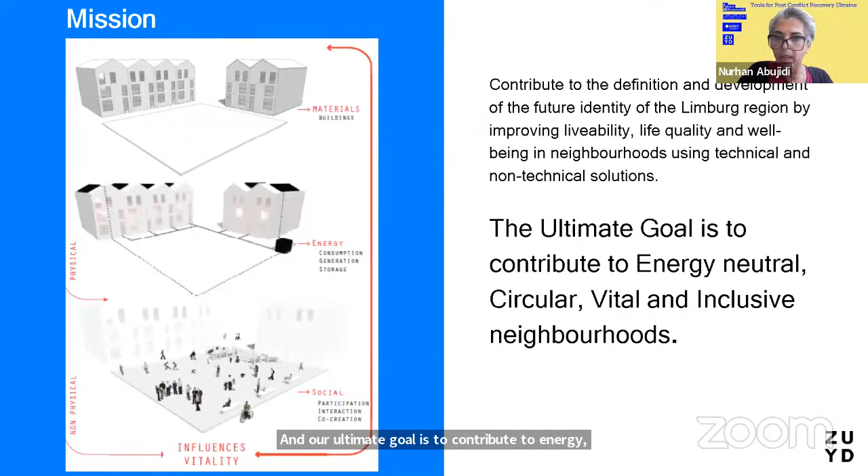So Smart Urban Redesign Research Center looks at neighborhoods focusing on 3 flows: material, energy, and people. And our ultimate goal is to contribute to energy neutral, circular, vital neighborhoods. Of course, now having this parallel discussion between the Netherlands and the occupied Palestinian territories, for me, it is actually where I find sometimes different types of destruction outside war zones also cause certain traumas, loss of identity, also losing the most important physical infrastructure that connects people to their heritage, identity, past, and also being a community in that very specific context.

From there, the parallels that I would like to share with you now. Of course, in the Palestinian occupied territories for decades, there is an ongoing process of destruction and reconstruction taking place. And I want here to highlight that the destruction goes beyond the physical built environment and infrastructure. It's about people's homes. It's about their being a community with a certain identity, heritage, and history connected to that physical built environment and infrastructure for the Palestinian case.

And I see many parallels also with the Ukrainian case. Very shortly on Limburg, and why we see these parallels between other types of destruction. Limburg, in the south of the Netherlands, also flourished thanks to the mining industry for decades. But in the 70s, all this industrial and physical heritage was wiped out in a matter of 2 to 3 years.

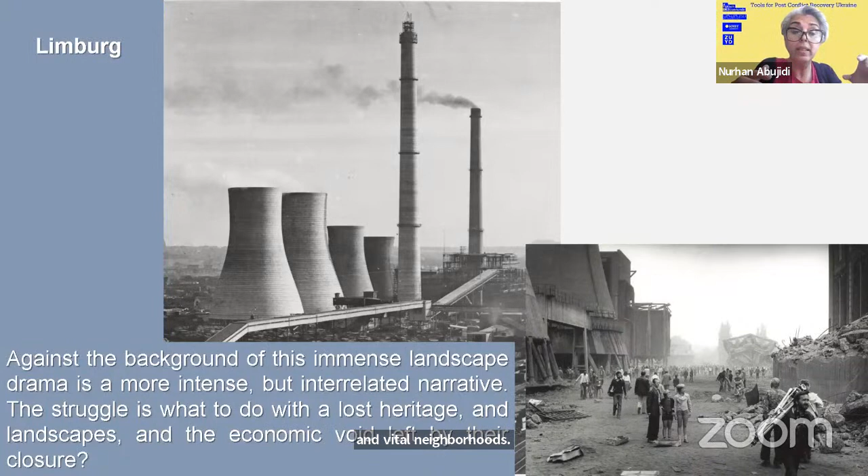And of course, within this background, you can notice from the 70s till now that it was a huge trauma for the local community, where they lost their sources of income, their social and spatial connections, and so forth. And there was also a huge economic void after this closure. And now we are working on how you can make an urban development and proceed towards achieving circular, energy neutral, and vital neighborhoods, while it seems like time froze for the inhabitants of South Limburg.

So the tips that I will now bring, or the lessons learned actually for our Ukrainian colleagues, concern waiting for big structural projects that will be expensive and long-term, waiting for this war to end and then starting the reconstruction process, and also being very much aware that foreign aid always has political agendas that might not fit with the people's ambitions about how their cities need to be reconstructed.

So to answer these questions, we are calling to use tactical urbanism to facilitate the start of urban transformation. And how can you do that? Learning from the Limburg context, these are the main pillars of the actions we are doing now in diverse neighborhoods in 5 cities in South Limburg. And the most important one is, though it is a trauma and dramatic situation, to use it as an opportunity to reimagine a bright and prosperous future. And that's why you need to look at it from an integral vision, in an interdisciplinary way.

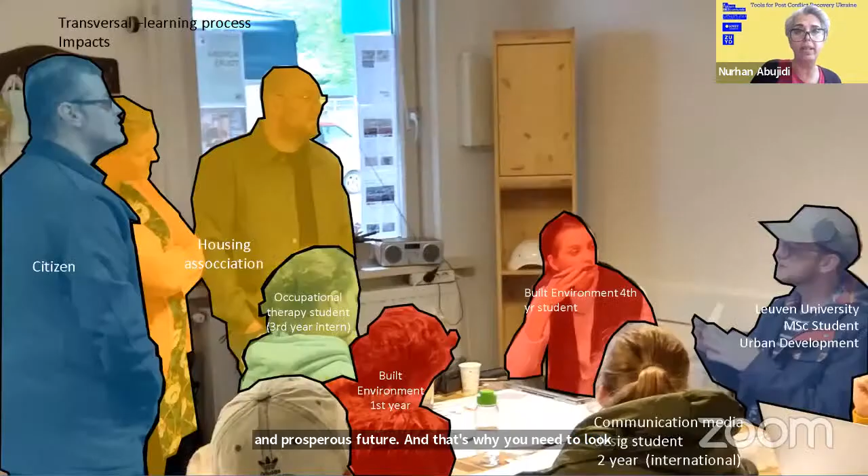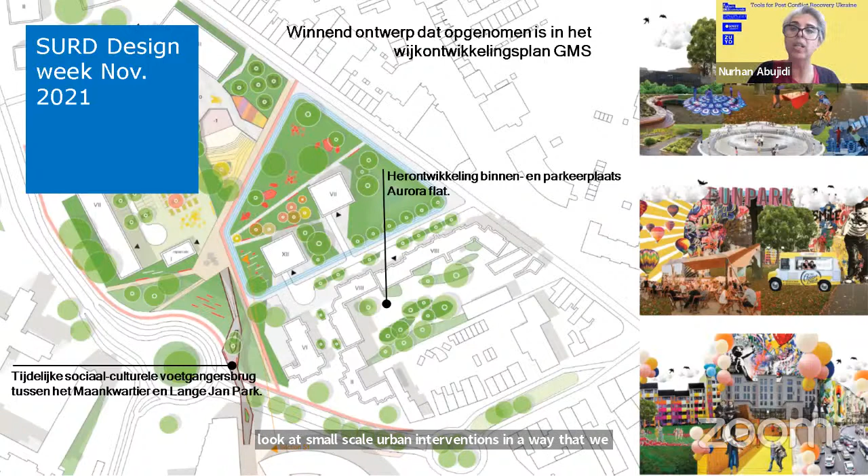The way we organize it, for example, in Heerlen, we try to engage our students and professionals, bachelor, master, and PhD from different disciplines, to look at very specific contexts, challenges, and questions about the urban transformation, together with our partners like social housing associations, and most importantly with the local citizens, to develop that vision from an integral perspective. Through very intensive design weeks and challenge weeks, we look at small-scale urban interventions so that we can start transforming the vision into more strategic projects and actions.

The three other pillars are, first, ownership. Ownership is not only by the stakeholders like the government; ownership, commitment and engagement require all engaged stakeholders to be active in this process. Most important is the local community, because they are the ones who need to define what kind of identity they want to produce or maybe sustain in their neighborhood. So their engagement is crucial in this stage.

And the third one is start small. Of course, you cannot just solve all the problems at once. We need to see what kind of strategic and tactical interventions are needed. So we are promoting action research in co-creation with the local community and stakeholders. We are physically present in the neighborhood via all these design weeks and different forms of activities that we organize during the whole year, challenges and so forth.

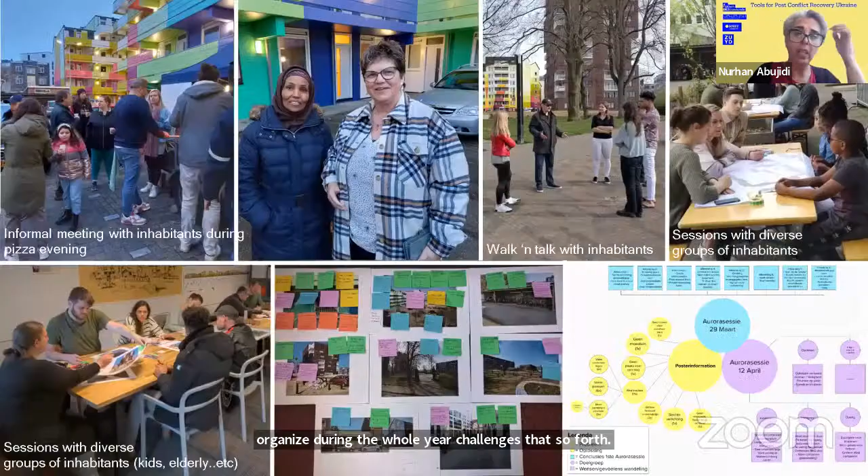And we try to make it a dialogue. As you see here, with the local community, we try to engage them to collect their ideas, ambitions, and perspectives for the development of the neighborhood in an informal and formal way, through qualitative and quantitative research.

The organization of these activities also requires us to live in or be permanently present in the neighborhood, to pick up the invisible dynamics that are important for that neighborhood and the local community, especially in neighborhoods with huge cultural diversity, which we find important to celebrate as part of the identity of the community.

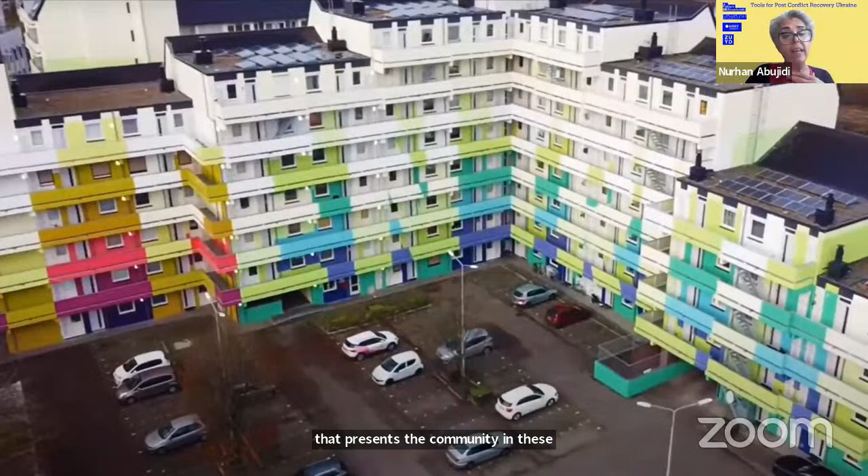An example is the Aurora social housing block, a strategic, very small project where this parking plot was transformed into a community space, while also being climate adaptive, circular, and celebrating the diversity of that local space.

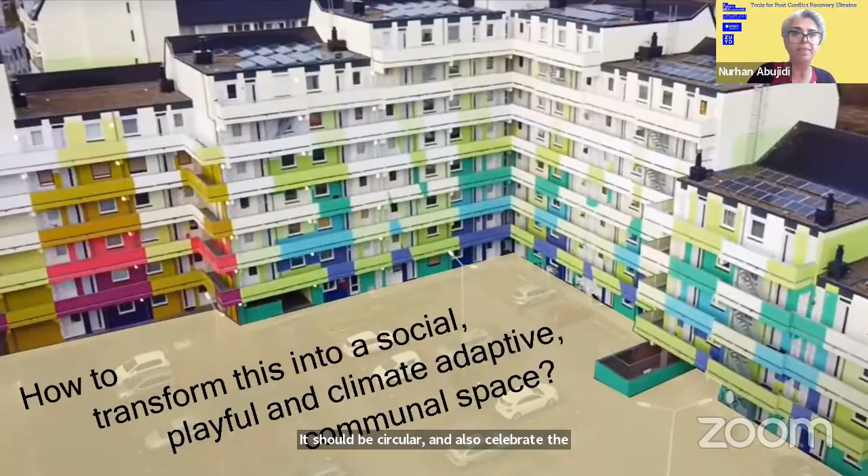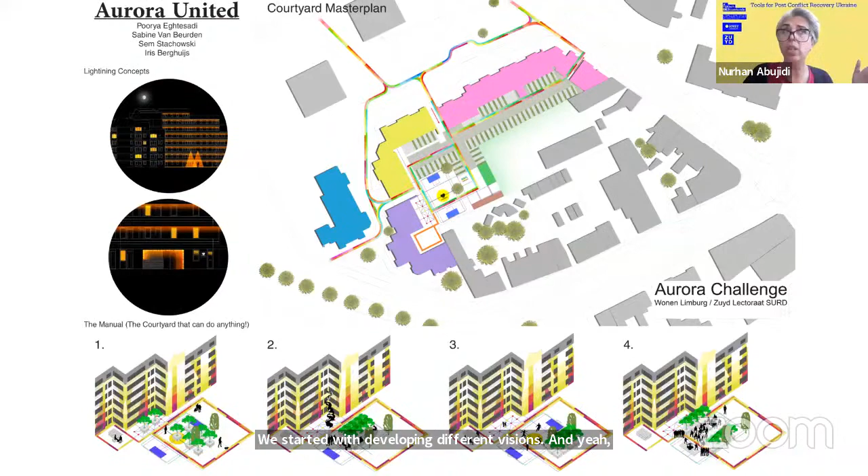We started with developing different visions, with different challenges and workshops over the past 2 years. This is how it looked 2 years ago.

Through the development of these strategic interventions, we developed a prototype from recycled materials, in this case wood, and experimented for at least a year with how people acted, reacted, or used this intervention, to see if it fulfilled their ambitions and needs in this specific space.

The last point I want to share is about using and focusing on local resources for value creation. This value creation goes beyond the material and environmental perspective; it is also about economic and social values.

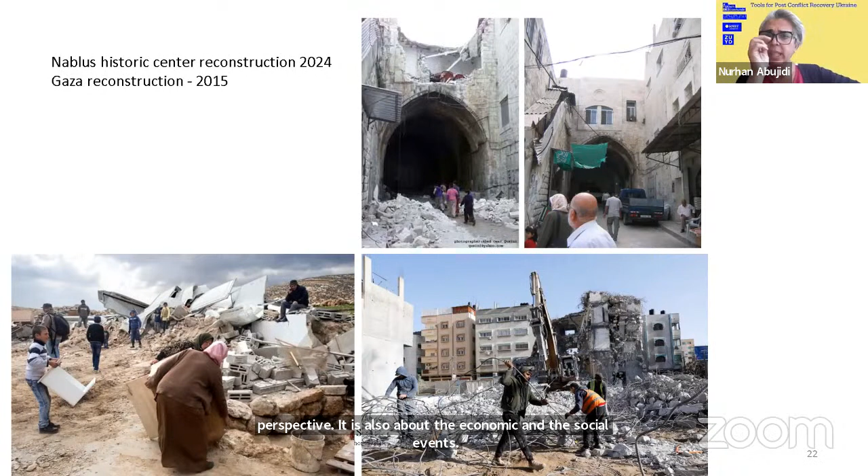Just examples from the Palestinian context: from the Nablus Historic Center reconstruction, and in Gaza, people use existing demolished material to reconstruct their heritage sites. We also build some temporary housing.

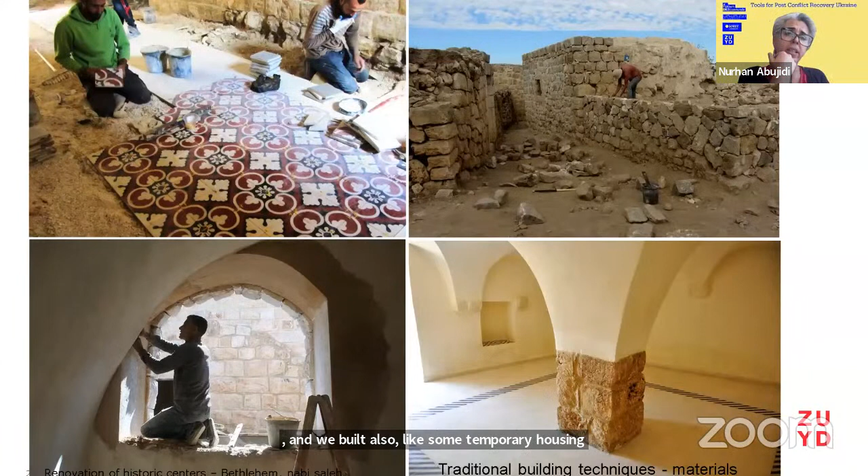We're capitalizing on existing building techniques for heritage sites, which are very important to maintain the heritage identity of the historic centers of the cities.

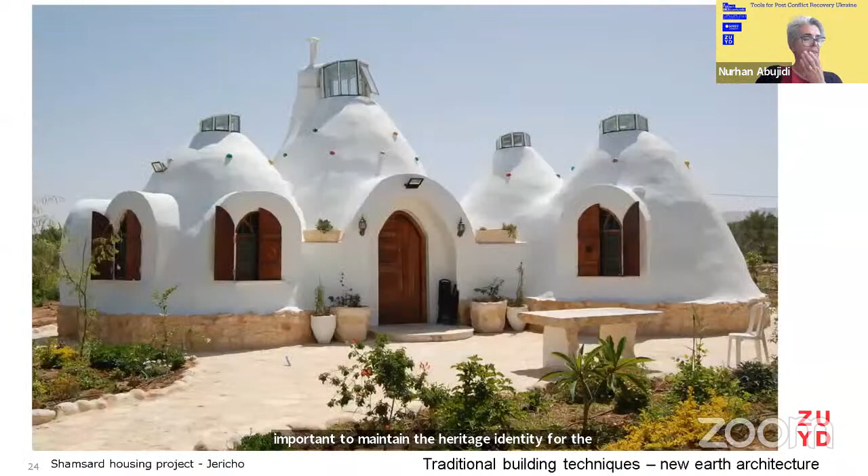Other professionals and young architects have used other approaches, like earth architecture, to produce new forms of housing, as we see in the houses built in Jericho.

I will end this quick introduction with a very interesting and unique innovation by an engineer in Gaza, due to the lack of construction material from the 20-year siege. He created a new type of brick using earth with added material, now tested in Gaza and being scaled up in other locations.

What I'm trying to say is it's very important to be tactical and pragmatic. While the war is going on, we need to keep feeding everyone interested in the reconstruction process, joining forces with existing resources and skills from students, young professionals, architects, and local stakeholders like social housing associations and municipalities, to see how you can start small in the neighborhood with strategic small-scale interventions that improve life quality and maintain people's hope to continue reconstruction after the war. I'll leave it here.

Yes, well, Roberto, thank you for introducing Zuyd and myself for this lecture, and thank you for having us here and providing the opportunity to present some of the research we are doing. My goal for the next 25 minutes is to inspire you, maybe a little bit to provoke you, and this will end in a short workshop where I try to collect some of your reflections and ideas on the presentation.

I will share with you in a minute. As Nurhan already said, my presentation is based on the Superlocal project, and I would like to start by first very briefly discussing the program.

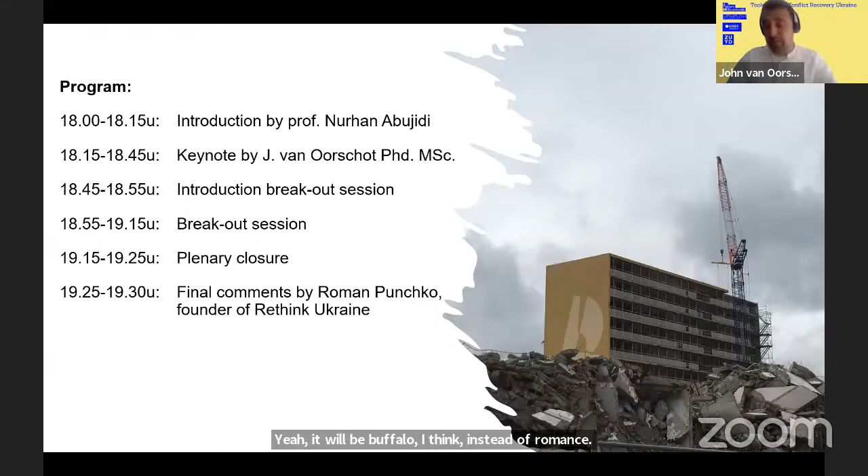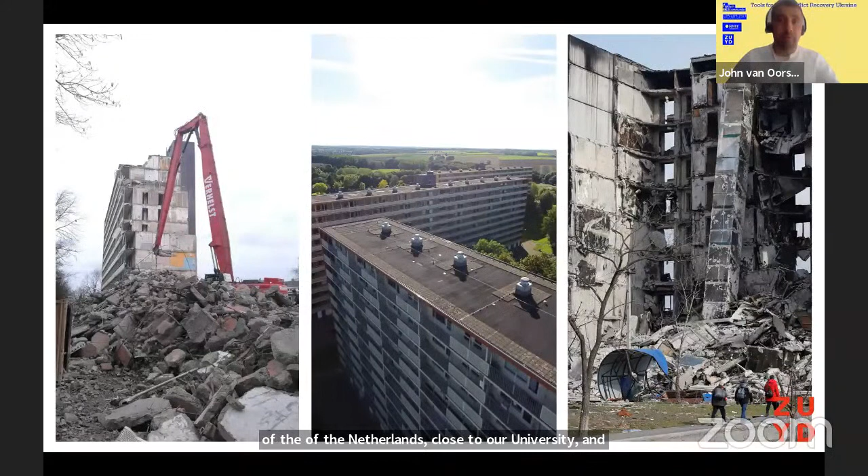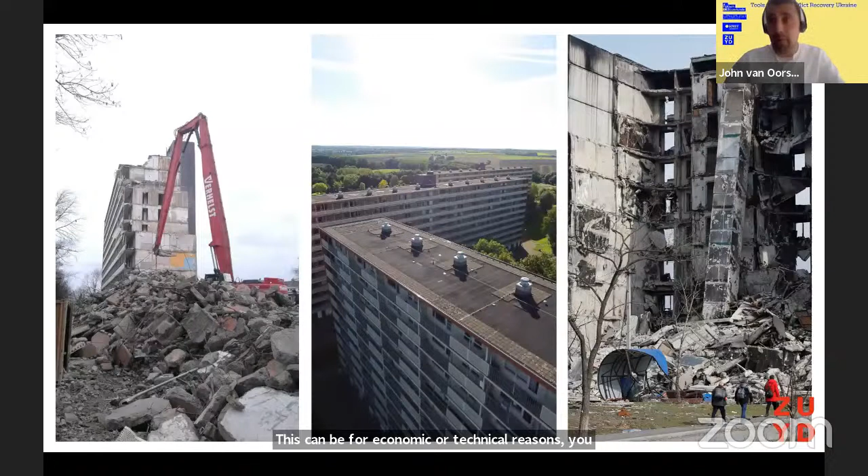I'd like to start with this picture. Typical 10-story apartment buildings, you can find them everywhere in Europe, from the far north to the south, from east to west. These apartment blocks may very well stand in Ukraine somewhere. However, this picture was taken in the south of the Netherlands, close to our university. Whatever happens with this building, at some point in time, these buildings tend to become obsolete. This can be for economic or technical reasons, or they are damaged by conflict, by war activities.

Unfortunately, in the middle, the same apartment buildings. On the left, what is happening in the Netherlands at the moment: these typical apartment buildings are demolished if they become obsolete. On the right side, it's not a demolition project, but a picture I took from a news feed about war damage close to Kiev. What is very unfortunate is that demolishing these properties this way also comes with a lot of loss of value, and that's for a large part material value, valuable materials being lost and turned into waste.

This fits within the take-make-waste economy, which is now most prominent around the world. At the same time, it's not only material value that's lost, but also social value, because this building was somebody's home. This building also represents social structures, groups of people living together. So besides all the material and technical values lost with demolition, intentionally or not, that also comes with the loss of other values being lost forever.

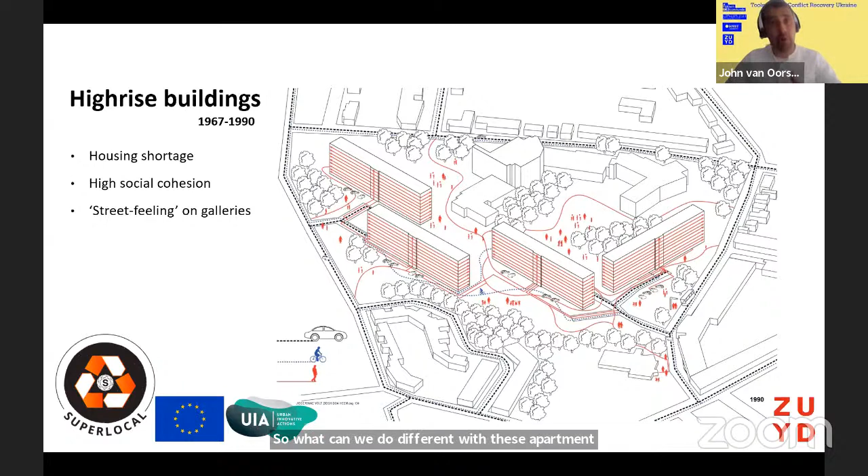What people experienced, as they tell us who actually lived in these apartment blocks, is they had this kind of street feeling. Every floor in the apartment building represents a small street. But we demolished one of the apartment buildings, and then recognized that this is not the way to go. So what can we do differently with these apartment buildings? How can we retain as much of the values these buildings represent?

This is a picture of the same area, taken somewhere in October last year. Work is still ongoing; it will be finished next month. Here you already see some of the things that have changed. One building block is refurbished, the other 3 have vanished. What we intended to do, in restructuring this area, is make an agreement with each other.

For rebuilding and establishing this area, we don't want to use new materials. We only want to use materials which we can mine from these apartment buildings. On the left you see 3 single family houses, in the middle some building blocks, and also the public space, still work in progress, fully redeveloped using only materials available in this area.

At the same time, we also said none of the materials is allowed to move out, so we really want to make a circular loop within this neighborhood. That was not the only ambition we had. We also said, let's try to install a closed water cycle, so with the same approach, water should be used in multiple cycles and not leave the area, for example to the sewage system.

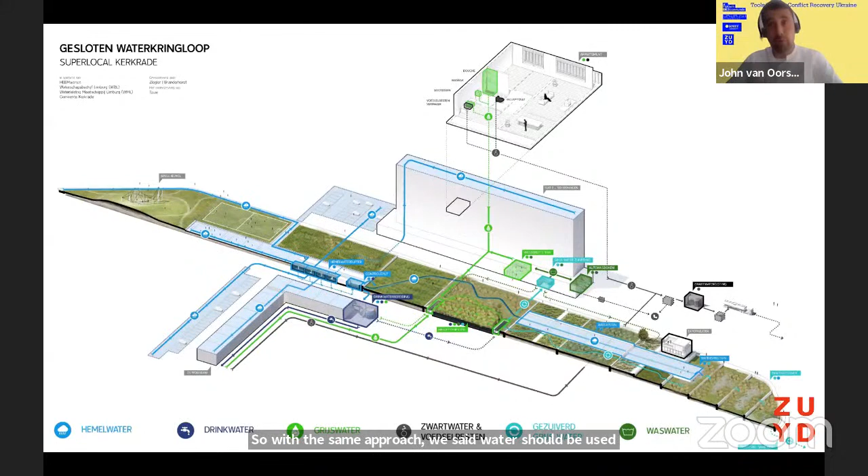As already referred to, this apartment building also represents a social structure, and that's something we'd like to retain. So we tried to provide new housing for people who wanted to stay in this neighborhood; they were the first clients of this redevelopment. These were the core concepts for redeveloping this area. We built upon the theory of the circular economy, trying to close material loops in this particular area. We didn't do it from behind our desk—we have multiple reports in line with what is published by the Ellen MacArthur Foundation, the lead authority in circular construction—but really tried to put these initiatives into practice.

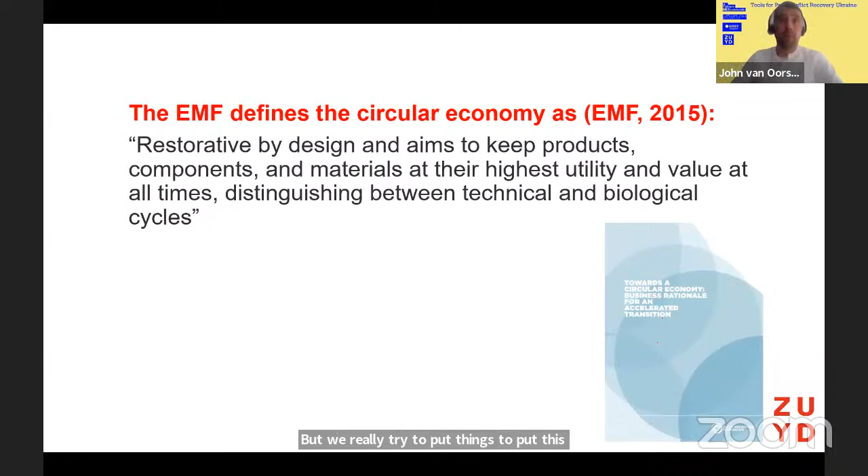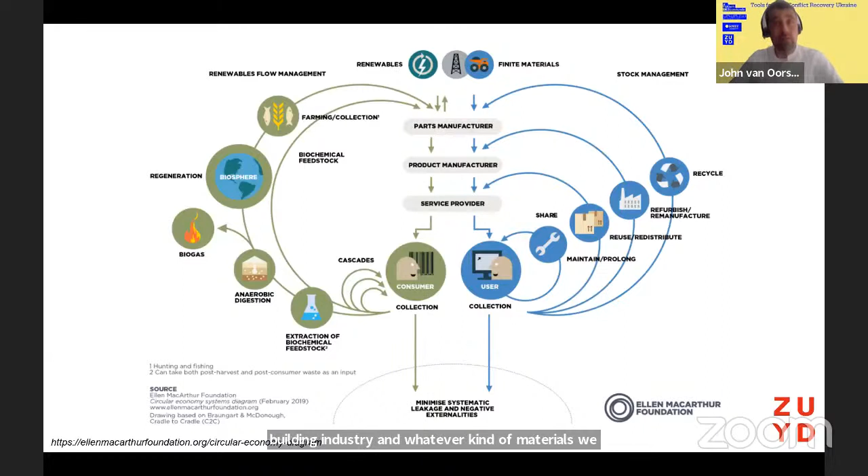Well, here you see that in a more graphical way, the famous butterfly model. On the right side, the technical loops. With various strategies, we try to keep the materials as long as possible in use in the building industry. And whatever kind of materials we like to introduce, because we need to add some new materials, then they should

Well, what we also added to this definition is that, take into account that mining all the materials to make construction products out of it, even the production and transport of the construction products itself, requires a lot of energy. And most of the time, they are the result of burning coal, charcoal, or gas. And this has an enormous carbon emission that comes along with it. So what we claim is, okay, well, keeping the materials in a multi-cycle use in the construction industry, this should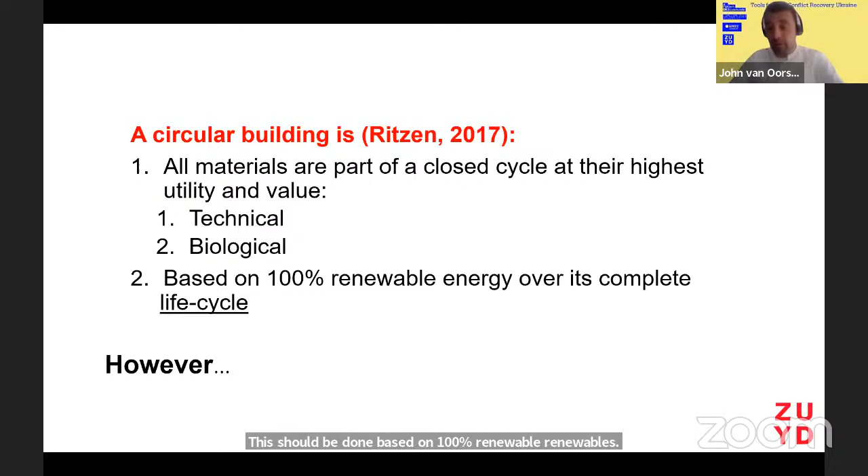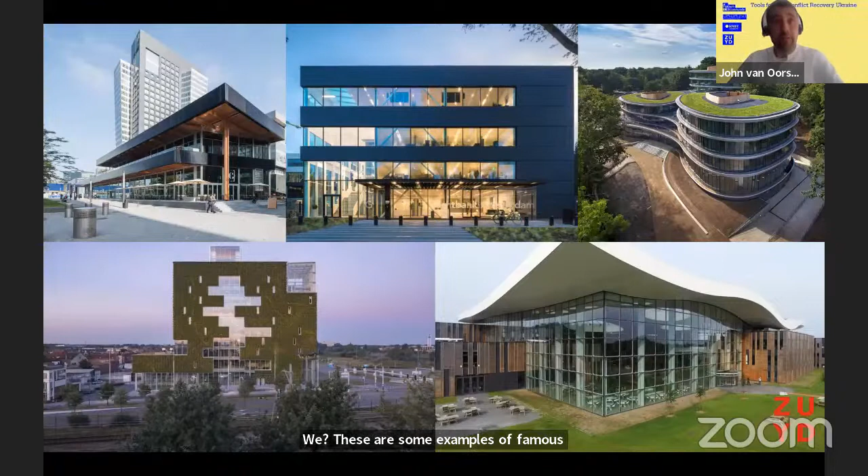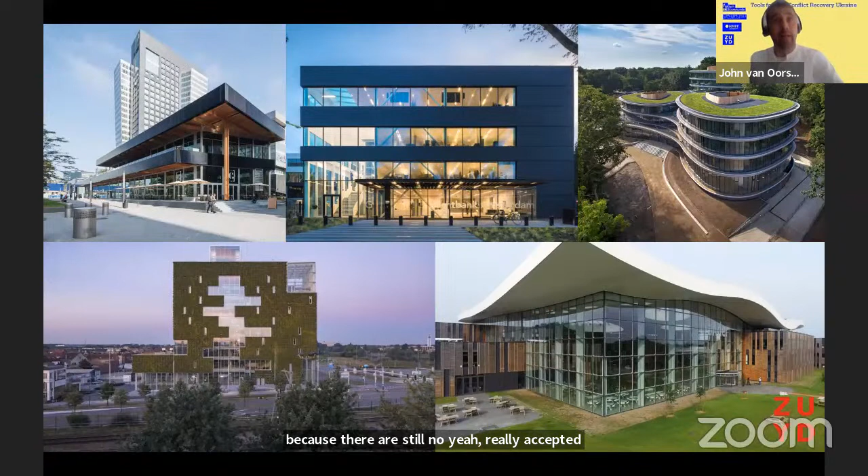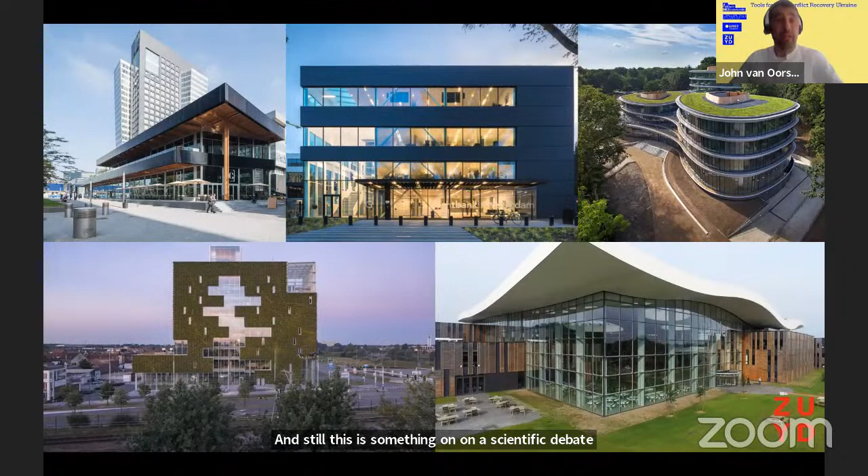be done based on 100% renewables. So, however, this is maybe quite a straightforward definition. These are some examples of famous Dutch circular buildings. Well, there are some issues with that, because there are still no really accepted validation models which you really can claim that you have a circular building. And still, this is something of a scientific debate for developing tools and concepts which you can use to really

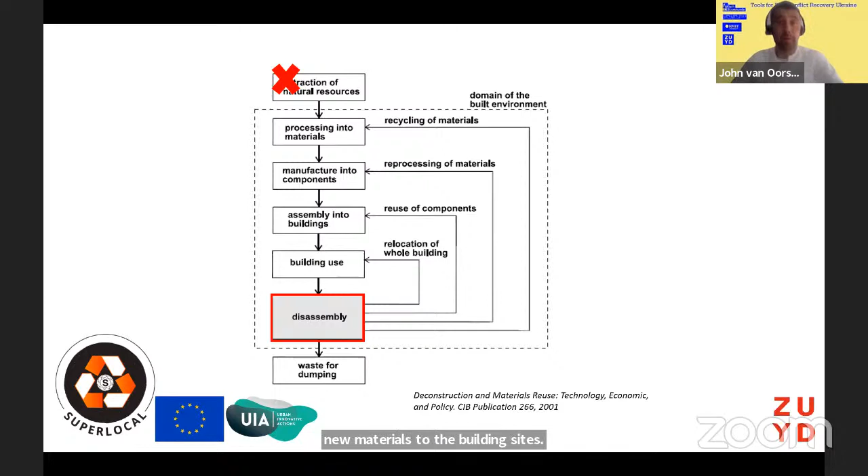validate if your building or your building product is fully circular. Well, making life a little bit more easy, I simplified the model. So vertically, it's a construction process, and we don't start from the top, that we start with transporting all kinds of new materials to the building site. Now we start from demolishing, taking apart the existing apartment buildings, and try to come up with solutions how to reuse these materials. Now, well, concrete, that's apparently, of course, the most used building material in these type of structures. So we start with developing circular concepts, how we can reuse in various ways the concrete materials.

And we came up with 5 scenarios. You can cut out entire apartment blocks for reuse. That's on the top left. On the right of that, you can also do it with panelized concrete elements. On a lower level of circularity, it's also able, you can, of course, select specific concrete elements for reprocessing and use them in a different way.

And at the lowest level, you can, of course, recycle materials to make from old concrete, new concrete, and start erecting new structures. Or you can make single building products out of that. That's on the top right, some construction blocks. And these are quite all, at least for the Netherlands, relatively new and out-of-the-ordinary construction technology. So nobody can tell you exactly how this works out.

So we started small. That's on the top left, on the left down side of the slide. We start with a small pavilion, a trial building, and we try to figure out if these concepts might work. And with some first trial experience, we start experimenting with 3 small housing units, and the most valuable concepts were finally demonstrated in a single family housing project on a larger scale.

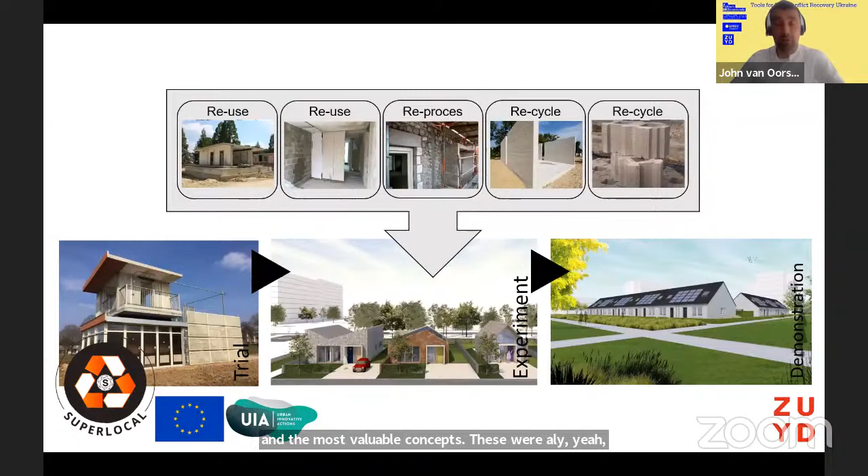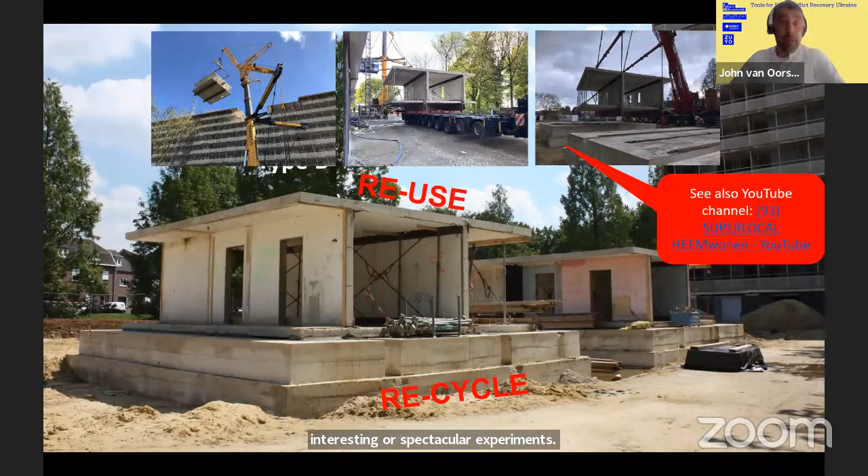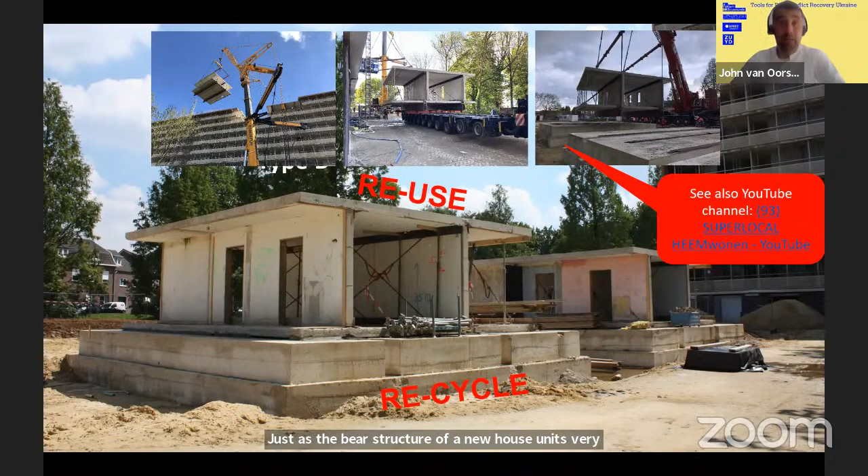Now, to show you some results of these experiments, this was one of the most interesting or spectacular experiments we did. What we simply did, we cut out a full apartment block and craned it down to be reused near the existing structure of the apartment building, just as the bare structure of a new housing unit. Very spectacular. It could have also gone spectacularly sideways, but in the end we managed to crane out these

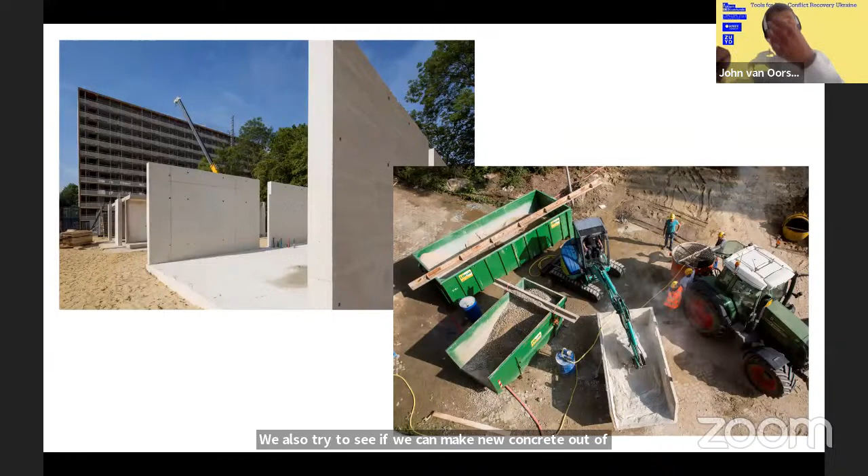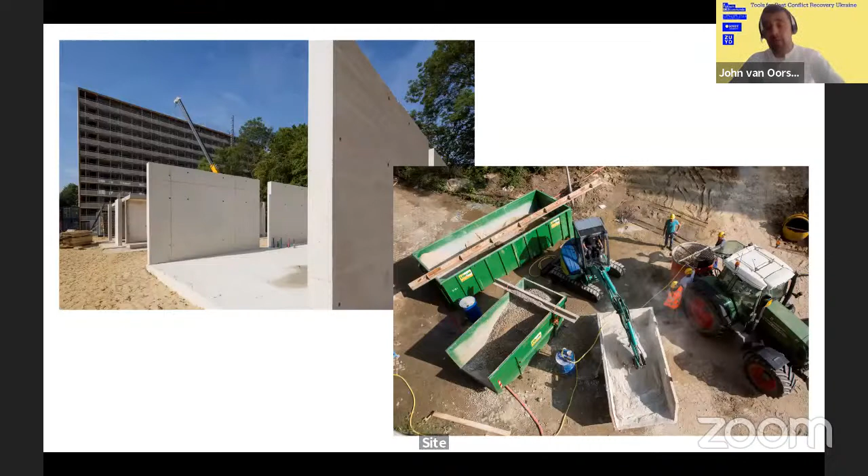Well, some other small experiments we did. This is with just concrete rubble. We started to use it as masonry in the building. Looks like if it's natural limestone blocks used, for example, what you can find in the south of France.

It's actually concrete, and you also see here in the facade that various objects are used as architectural elements to decorate the building.

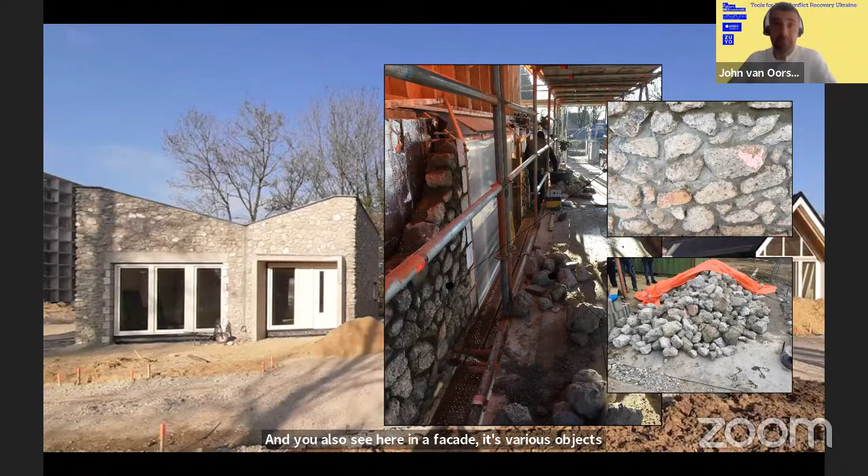If you're experimenting, not everything works. Some innovations simply fail, and this was one of the experiments, with the 2D concrete slabs. We were not able to crane them out, they all broke. So this was really a failure, the technology was failing us. This experiment simply failed.

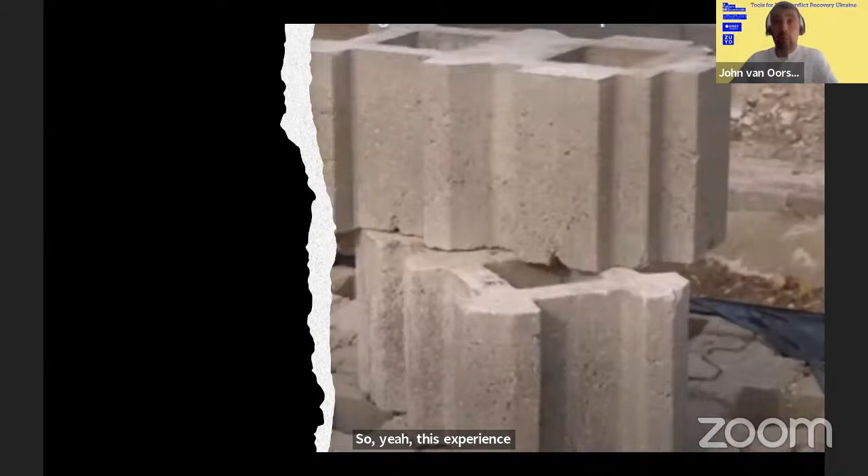We also constructed various bricks, but this is very new technology. It's not poured into a formwork; actually it's made out of vibro compaction. So by pressing and vibrating the concrete mixture, you can make these forms of brickwork without a wet procedure, as you'd use pouring concrete traditionally. But this is also a very expensive and still immature technology, and we were not able to construct anything out of it. It's still a work in progress.

Some impacts - what do you gain out of it? Has this an environmental impact? On the left side of the chart you see this baseline bar. This is the amount of carbon emission exposed if you construct the bare structure of these housing units in a more traditional way.

We compare that with constructing the same structures but with recycling and reusing existing materials. Craning out one or two apartment units, as we did, isn't very interesting in terms of environmental impact - it really exceeds the carbon emission, in particular due to all the heavy transport and equipment needed. If you can repeat it a little more, you can lower that - that's the third column in this graph. If you can replicate, you can really lower the carbon emission per unit because you can use your equipment more efficiently. But what isn't taken into account here is that with craning out more apartments, you also have to transport them a larger distance from the existing apartment building.

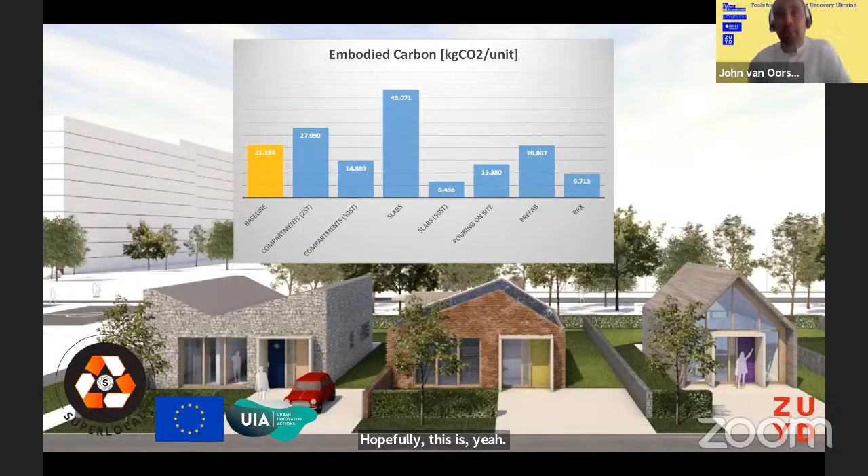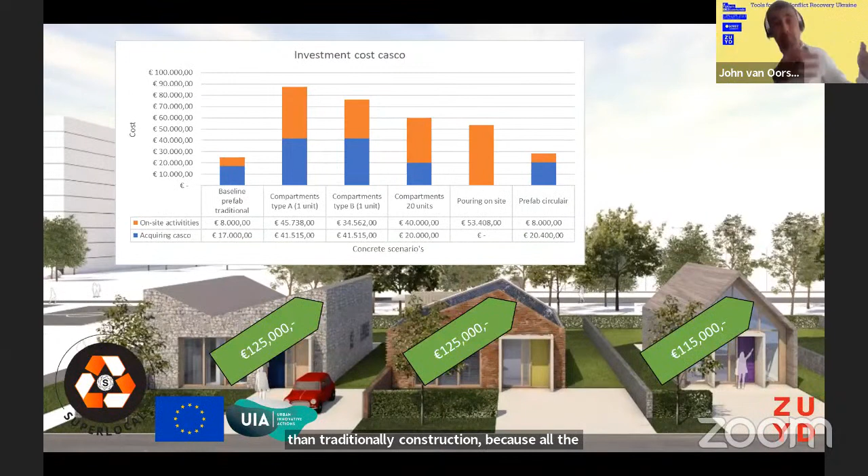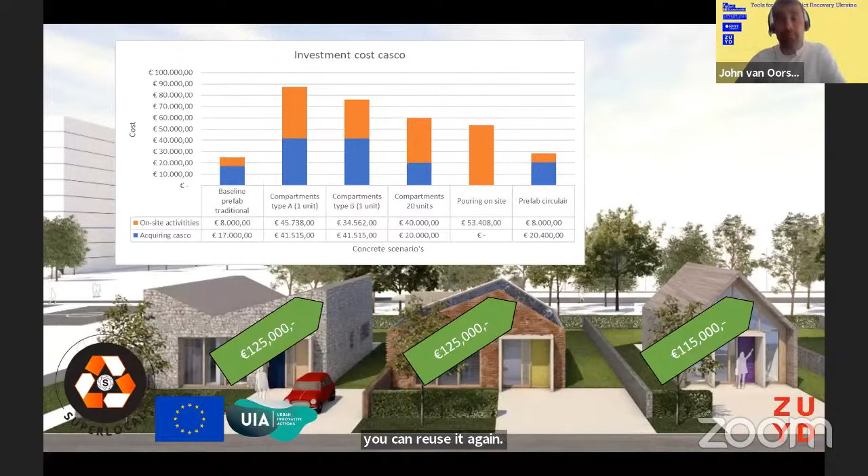Well, costs. I don't want to dive into that very deeply, but as you can imagine, it's far more expensive than traditional construction, because all the work you need to do for mining the materials before you can reuse it again is a little bit less efficient than using traditional mined natural resources.

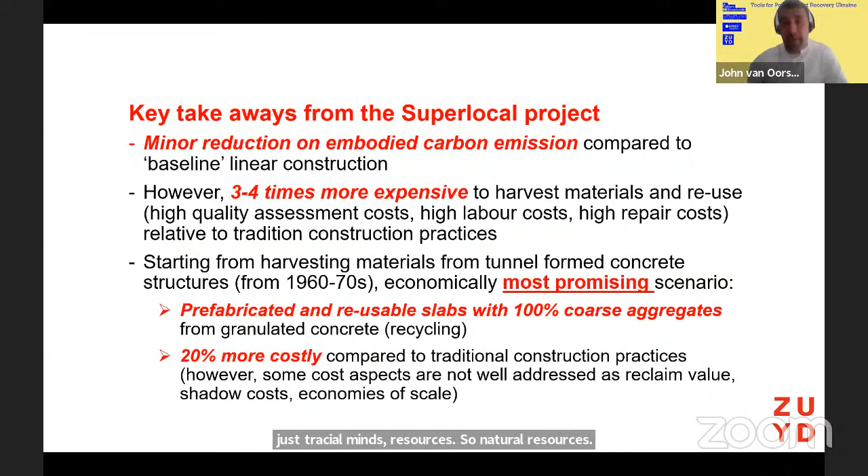I already have covered this, just a small wrap up. But I'd like to focus on something else. I like to go back in time, to a period when we were also facing challenges rebuilding the Netherlands after the Second World War. Just shortly after the war, there was this popular phrase that housing shortage was public enemy number one. There was really a problem that there was not enough housing available for people living in the Netherlands, or coming back to the Netherlands, because so many buildings were damaged during the war. This was then one of the priorities, although not the top priority, of the Dutch government. The Dutch government was really focusing on rebuilding the economy, not on providing housing. That came third or fourth as a priority.

But then from 1948 onwards, we had some support from the Marshall Plan for rebuilding our lost dwellings. In that period, the Dutch government really took the lead in building new housing. Despite the fact that we're now living in a time when there's a lot of distrust in governments, in those days there was really strong social support and commitment for rebuilding the Netherlands. We had this utopian belief that we could really build a better country after the hard time of the war. The governmental program ran for almost 25 years, from 1945 up to somewhere in the early 70s, and this led to the construction of 1.5 million affordable housing units.

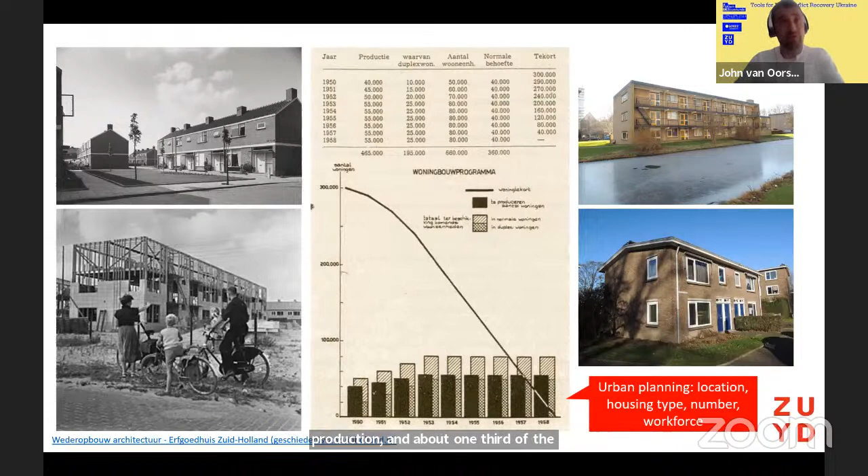They also started experimenting with a more industrial way of producing housing. So you see this steel structure on the low left with concrete panels mounted on it, just to speed up housing production. And about 1/3 of the housing in those days was constructed with these industrial housing features. Well, this is what happened, but with this very short-sighted perspective on building as many housing units as you can, quantity over quality.

It also came with a lot of problems which we're still facing today. We've really faced poor quality, high maintenance costs. The buildings have low energy efficiency, so we all have to do these deep retrofits to lower the energy consumption of the housing. They were really produced as one type fits all housing. They were inflexible to accommodate various kinds of target groups. They're not suitable for accommodating the elderly or disabled. The voice of the customer, the end user, was completely discarded.

And then the environmental effect: it was a significant consumption of natural resources, significant deposition of pollutants, including all these greenhouse gas emissions like the carbon emissions. And as we experience today, it's now resulting in a substantial flow of waste materials. And maybe there were some other issues which are not on the top of my mind right now, but it also has a lot of side effects doing it this way.

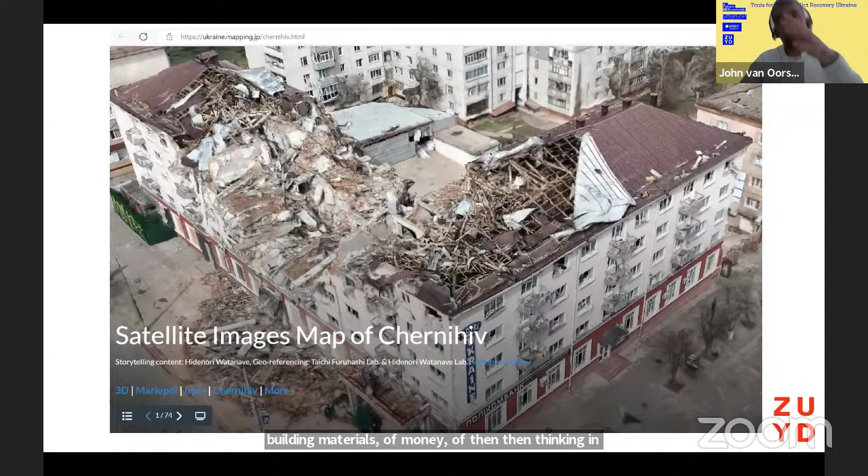So this is also what really triggers me, maybe this could be a concept which is very much applicable to this kind of properties. So I still see some value here. In times of rebuilding, where you have a lot of shortage of building materials, of money, then thinking in this way is really needed, apart from the discussion of how you can reduce the environmental impact.

Let's see if I can get you inspired, and let's go for a breakout session. So this is what we're going to do. We are with quite some people. You will be subdivided into breakout rooms, and this will be done by Roberto in a couple of minutes. And if you are in a breakout room, I invite you to go to the Miro. It's a digital platform. And in that platform, there is a poster ready for you, at least a framework of a poster that still needs to be developed.

And you are assigned to a breakout session, and that breakout session has a number that corresponds with the number on top of your poster. That's the place where you have to go. And what I'd like you to do is select violence-affected buildings. You can use the website I was referring to, but also maybe you're close to a building, or even in a building, which is heavily damaged at the moment. You can take that as a case, put it on the poster, and try to come up with what kind of values you can recognize in that property.

And that can be anything. So from very technical environmental aspects, if you're an engineer, that's maybe your most logical perspective. So you have some value frameworks relative to that. But you can also have very socioeconomic ones, if you're an urbanist or a social worker, about what kind of value these properties still represent, what we should actually take into account rebuilding that place.